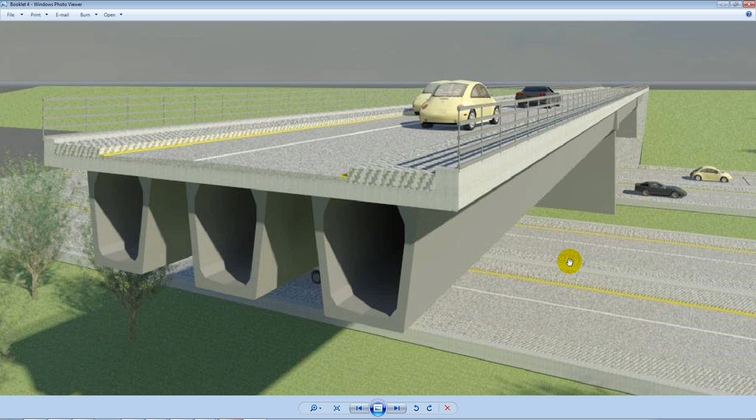Hi, in this video I will be showing you an example of a two-span composite precast concrete bridge. This bridge will have the W11 beam with a concrete deck on top of it. There are parapet beams at the two edges, and we'll have the central supports composed of two piers, and then at the ends we will have the abutments fixed to the deck.

Now let us see the details of the sections in the AutoCAD format before going to the modeling process. So that's the cross section of the typical deck section. As you can see here, it's a 10-meter wide deck section, and you have W11 beams. The center to center distance between the beams is 3 meters, and you have a 1.5 meter wide verge or footway at either end, and then you have a 500 millimeter wide parapet beam at the edges.

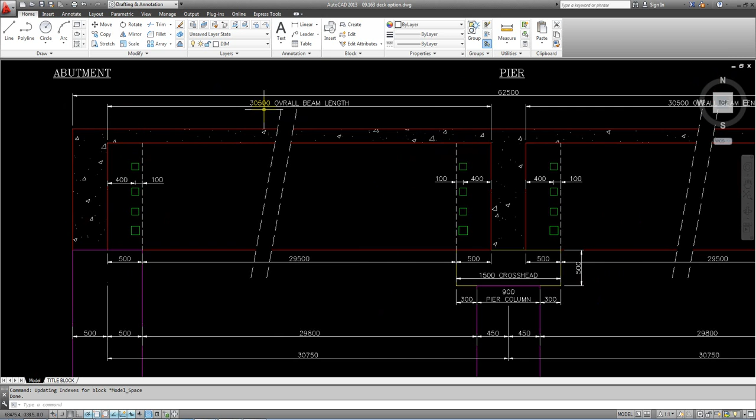And we will have pre-stressing applied to this bridge when we see the modeling of the bridge. The pre-stressing is typically applied as pre-tensioned strands with a load of 200 kilonewton at each pre-stressing strand. The concrete class for the precast beams will be C50, and the rest of the concrete elements, that is the deck, the parapet beams, and the abutments and piers, will be C40 grade.

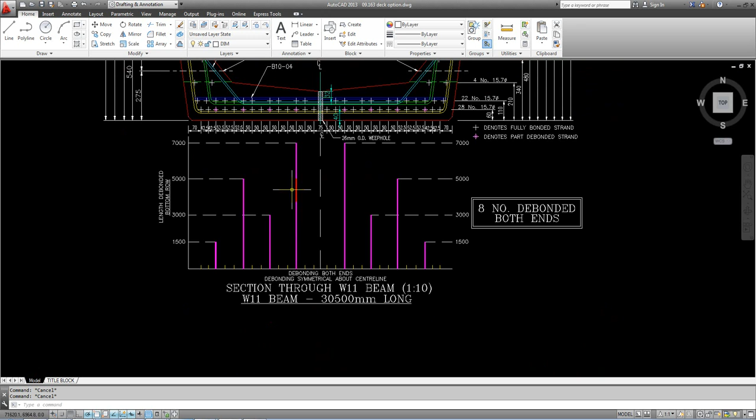We also have some debonded tendons at the bottom fiber of the precast beams, and the debonded length is shown in this diagram here. So they are varying lengths, and we will incorporate them in the modeling procedure. So without any delay, let's start the modeling for this bridge.

So I've opened up the blank Midas Civil file. I'll click on this option for new project. Okay, so here I have the blank Midas Civil window. I'll switch to the top view, and we'll start by creating a node. So that's 0,0,0, apply, and we have a node here. Then we will extrude a main or longitudinal beam out of this node. So select all, we'll select this node, and I'll type in the distance by which I want to extrude.

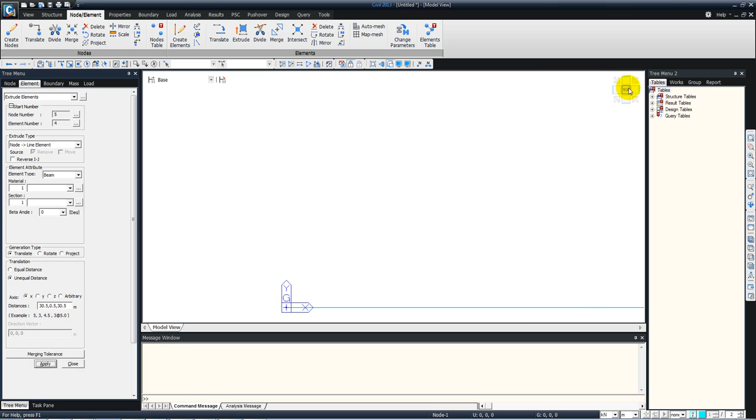So I'll put in unequal distance, and in the X direction I'll say 30.5 meters, which is the length of one precast beam, and then we have a gap of 0.5 meters, and then another precast beam 30.5 meters, and say apply, and switching back to the top view, you can see the lines have been modeled.

Now I will copy this in the Y direction to get the other precast beams and also the parapet beams. So select all again, and this time using the translate elements feature, translating with unequal distance in the Y direction. So we have 1.5 meters, that's the distance between the edge parapet beam and the external precast beam. And then we have two precast beams separated by 3 meters, and then another parapet beam separated by 1.5 meters, and click apply. So that's what we have got here.

Now we will be doing a grillage analysis for the deck, so I will create the transverse grillage members. So I'll go to create elements and just create an element like this, and we'll copy this to the other side. So using the translate function again, and this time

equal distance, X direction, typing in 1 meter, and number of times is 30, and making sure that I check on intersect node and element, so it will automatically intersect the transverse beam at all the longitudinal beam intersection points, and apply. So that's copied now, and we'll create another one over this side. So I'll try to keep this bridge as symmetric as possible.

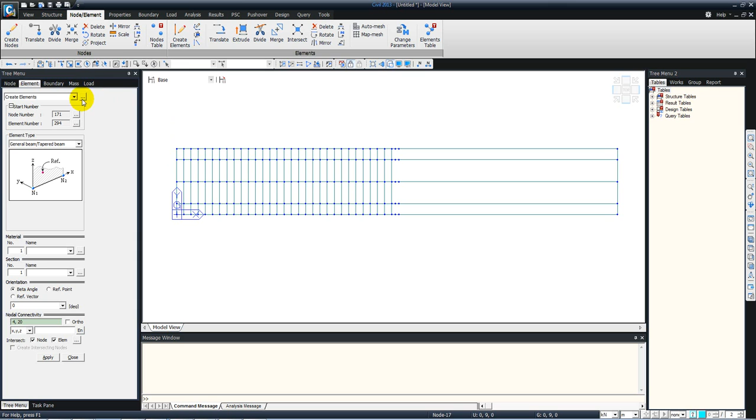So I'll create another one over this side and translate, and this time -1 meter and 30 times, and we'll select that transverse beam and say apply.

So that's modeled now. Now there is also a central diaphragm over here, so I will go to create elements and we'll model the central diaphragm like this. By default you can snap at the midpoint of a given element, so I'll snap at the midpoint here and snap here. That gives me the central diaphragm over here.

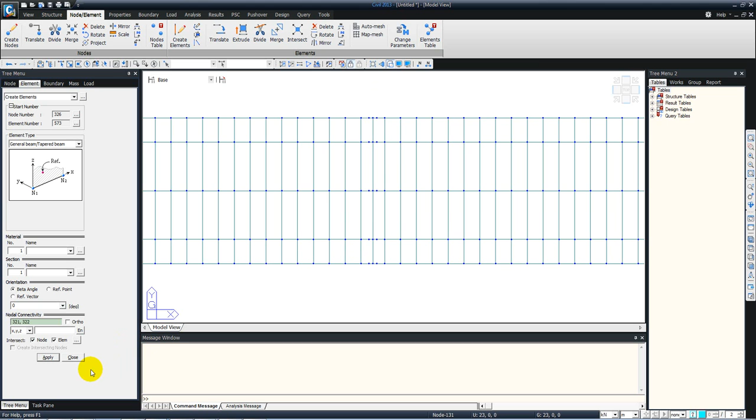And now I will create the abutments, the crossheads and the piers. But before going to the modeling of those elements, let us first define the sections and materials for the deck, what we have got here.

So for the sections, we will start with first the W11 beam section definition. So the W11 beam is a special beam which is the product of Banagher concrete. So that W11 beam we will bring in from the AutoCAD file.

Just to show you how the import can take place, I'll open up an AutoCAD file which has the skeleton of that section. So that's modeled with all lines. So if you have a polyline, you just use the explode function here, select everything and use the explode function to simply break it into lines. So right now they are all broken into individual lines, and save this as a DXF file. So make sure this is a DXF file, not a DWG file.

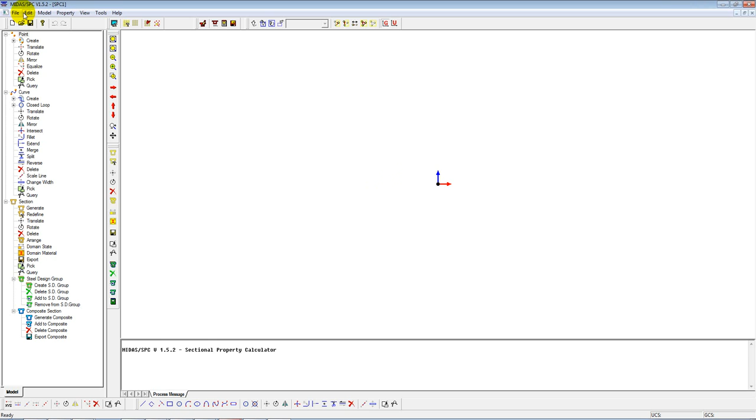Then we go to tools and we go to section property calculator and make sure the length units are same as the AutoCAD length units. So click OK and then go to file, import from AutoCAD DXF, and select the AutoCAD DXF file and click OK. Click yes, and that's your section here. These are only lines now.

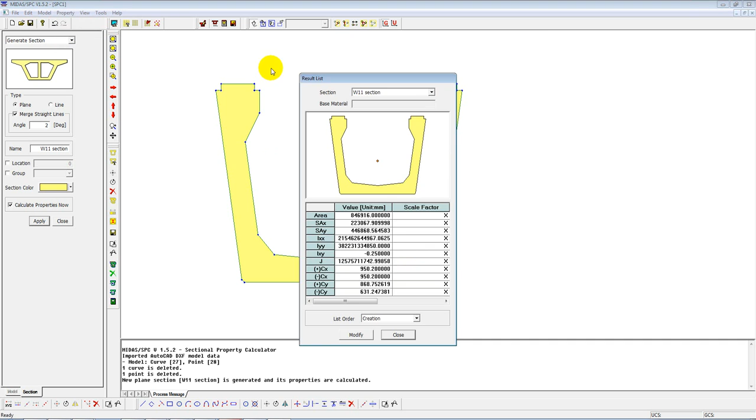So now I will ask the software to create section properties out of these lines here. So section and generate, and we'll make a solid section, so plane type, and select all the lines here and enter a name, say W11 section, then calculate properties now and apply. So that will quickly generate the properties of this section, and you have a dot marked here that represents the centroid for this section. To list out all the section properties, just to have a check, we can go here and say list section property, and it will show us all the section properties for this particular section.

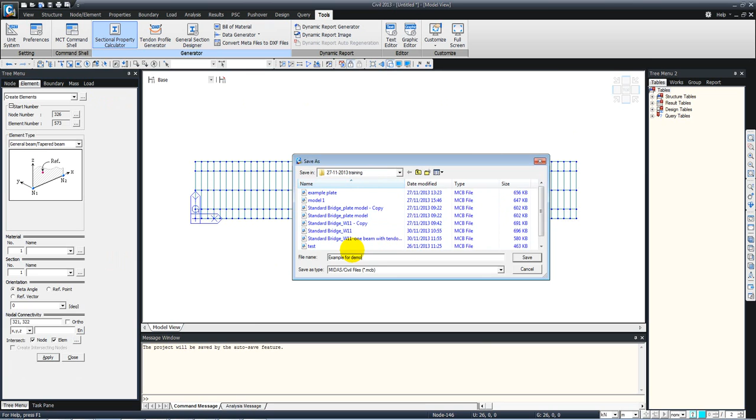Okay, now we will export this section back to our analysis package. So export, select Midas section file, click on this box here and say section for analysis, or give it any other name, save, and click on the section, click apply, close, and I don't need this file anymore, so I'll just say no. Okay, just in case I'll save this model as well, so you should always keep on saving the model from time to time so that you don't lose any data.

Now we go back to properties and say section properties and say add, go to the pre-stressed concrete type of section, PSC, say PSC value, and I'll type in the name, so this is W11. Import from section property calculator and click on the section which you just created, open and click OK. So here you have all the section properties and the section shape included in the main model.

Now you can change in the properties. If you expect some cracking in the section, you can change them here. You have to input some parameters for the design based on this diagram here. So the software also does the design of pre-stressed concrete sections. So this is for that purpose.

This particular data will not be used in the analysis, the T1, T2 and BT and HT, but I'll just enter some values here. So typically the thickness of the web and flange in this particular section is 0.17 or 170 mil, and the width of the section is 1.5 meters and height of the section is also 1.5 meters. Thickness for torsion is the total thickness of the webs, so that's 0.34.

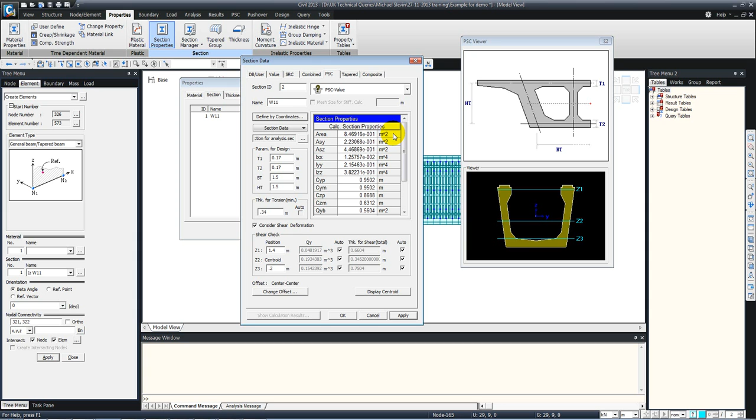So this particular section gets applied here. Now we are doing a grillage model, so the sections should be composite with the deck. So I'll use the composite section to create a deck on top of it and include the deck as well in the section properties. So select composite PSC, I'll give it a name, say composite section.

Slab width for one particular precast girder, that is effective slab width, I'll take it as 3 meters. Number of girders is 1, 3 meters, and 0.2 meters or 200 millimeters is the thickness of the slab. And now here I'll specify which precast beam I'm referring to, so that's W11. Click OK, and from the material I'll select the material for the slab and the material for the girder. So for the slab it is C40, for the girder it is C50.

And click OK. Now the elements are normally referenced as the centroid. The element line is always referenced as the centroid of the section, but for the purpose of analysis and applying the loads, we would want the deck to be at the top always. So I'll change the offset for the section and make it center top, so that now the element is referenced by the top fiber of the deck.

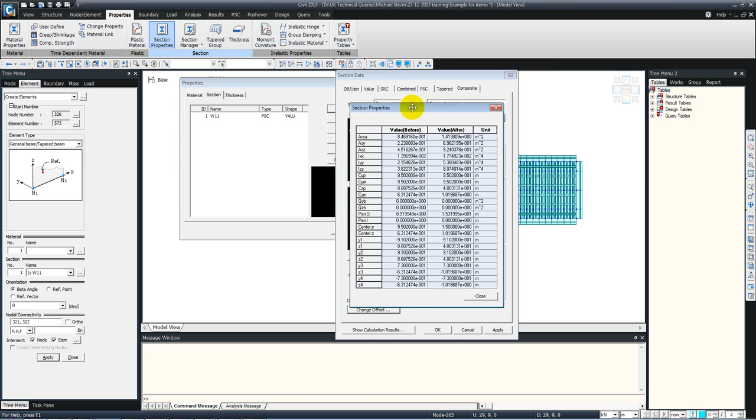And if I click on show calculation results, it will show me the properties before composite, that is due to the precast girder, and after composite, that is including the deck as well. So close this and click apply. So I've got the composite section. Now I will add some other sections. So I'll start with the central diaphragm. And that's a rectangular section. Height is 1.7 meters and the width is 1.5 meters, and that is also center top.

Okay, and apply. Then there are the end diaphragms. And the end diaphragms are 1.7 meter in height and 1 meter wide. Apply, again center top. Then we have the transverse grillage members. So transverse grillage members are also center top, and the height will be equal to the thickness of the slab, so that's 0.2, and we have kept a spacing of 1 meter for the transverse members, so the transverse sections will also be 1 meter wide.

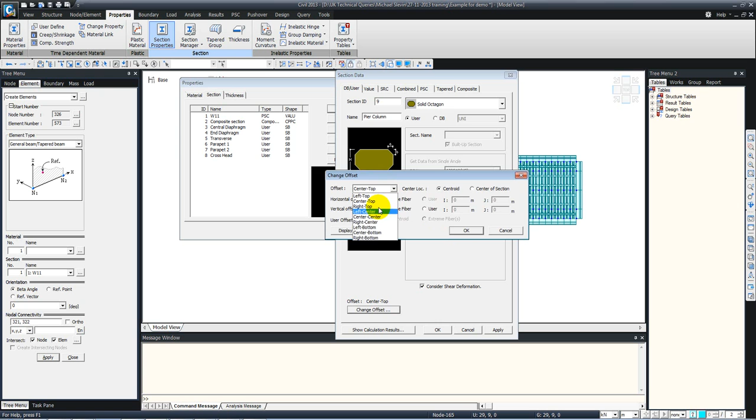Okay, and apply. And then finally we have a strip footing at the base of the abutment. So strip footing, that is a solid rectangular section, center, and 1 meter deep and 4 meter wide, and click OK. So we'll use these many sections for our model. Then I'll quickly define the materials as well. So I'll go to material, add, and starting with concrete.

The deck is C40. Now what we will do is we won't be defining any density for the deck. We will apply the deck self weight as a wet concrete load before the concrete becomes composite. So in the analysis we will be looking at the stage by stage analysis, that is what are the results before the deck is made composite, and what are the results after the deck becomes composite. So we will apply the weight of the deck on the precast beams when it is not composite with the precast beams. So that's why we are trying to keep the material density as 0, so that it is not considered automatically, and we have to manually assign the self weight of the deck.

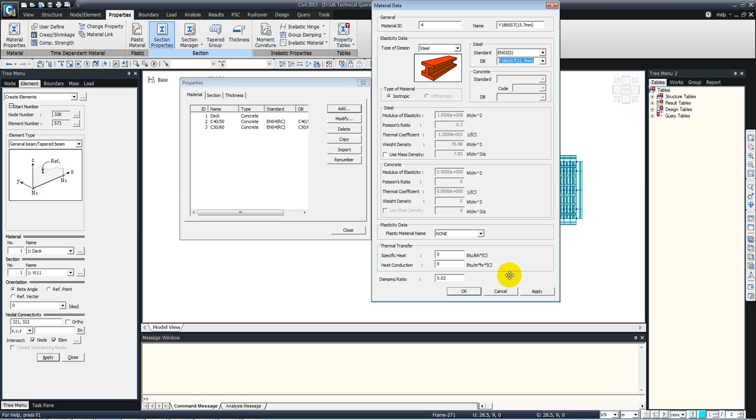So I'll change the name as deck here, apply, and then I'll model the other materials. So for the rest of the structure we have C40, apply, and then for the precast beams we have C50, apply, and then we have steel tendons. So we will be using 15.7 millimeter dia strands. So I'll use the highest tensile strength strands from here, and click OK.

So now we have got all the materials and sections we are going to use in the model. So the only thing now remaining to be assigned or defined in the properties is the thickness. The thickness will be used for the abutments, because abutments we will model as plate elements. So I'll add the thickness, and that is 1 meter thick. Click OK and close. So I'll close this now.

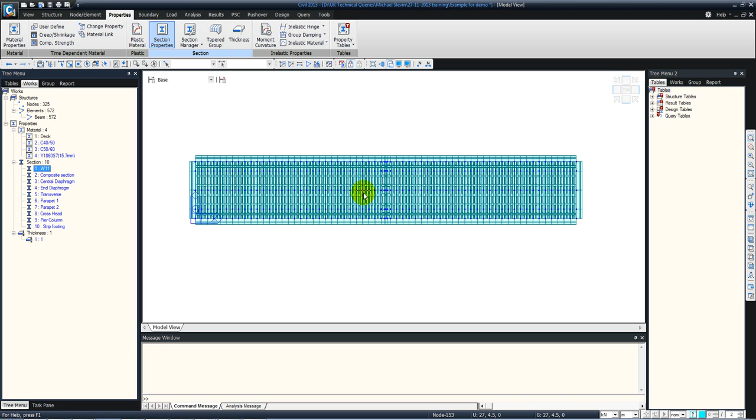As you can see on your model view, we have all the sections assigned with material 1 and section 1, and we don't want to do that. We need to correctly assign them now. So we will use a simple drag and drop feature in Midas to correctly assign the material and the section properties. So I'll change back to the wireframe view by clicking on this button,

and first I'll start by selecting the precast beams. So selecting all the precast beams, which are the central beams, and drag and drop C50, double click on C50 again, and drag and drop the composite section.

Now I will change the transverse beams into transverse sections. So what I'll do is make the selection filter Y from here, and select all. That will select all the transverse members, all the Y direction members, and drag and drop transverse. Double click on transverse and drag and drop deck, making sure that is deck material. And I'll now switch this back to none. Otherwise, you will always keep on selecting the Y direction members.

Okay, now we'll modify the transverse properties at the ends, because these are not transverse elements but diaphragms. So these are the end diaphragms. So drag and drop end diaphragms, double click on end diaphragms and make sure they are C40 material. Okay, then we do the same here for the central diaphragm. So we select the central diaphragm member and drag and drop central diaphragm, double click on central diaphragm and drag and drop C40. So for each element we need to make sure that we have the correct material and correct section properties assigned.

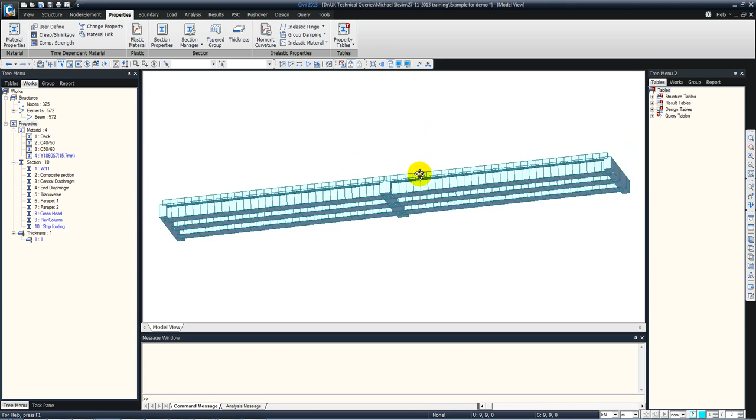Okay, then we have got the parapet beams here. So I'll just select one of the parapet beams and make it parapet 1, another one here and assign parapet 2. Let's check the sections by clicking on the hidden view and switching to the side view. Okay, let's check from the bottom. We've got the sections correctly assigned except for the parapet sections.

I'll show you why. I'll inactivate the end diaphragm, and let's see from the side view. Okay, so we don't want the parapet to be inside this line, we want it to be exterior to the slab so that the dimensions meet accurately. So what I'll do is double click on parapet 2 and drag and drop parapet 1. So shift it this way and select this parapet, drag and drop parapet 2.

Okay, now we need to shift them both downwards, because the offset we specified for the parapet was center bottom, which means the left and right bottom corners now represent the reference line. So I will shift the offset slightly so that it meets exactly at the deck level. So I'll right click, go to parapet and change the offset to user defined, say 0.2 meters, click OK and click OK. So that's shifted downwards.

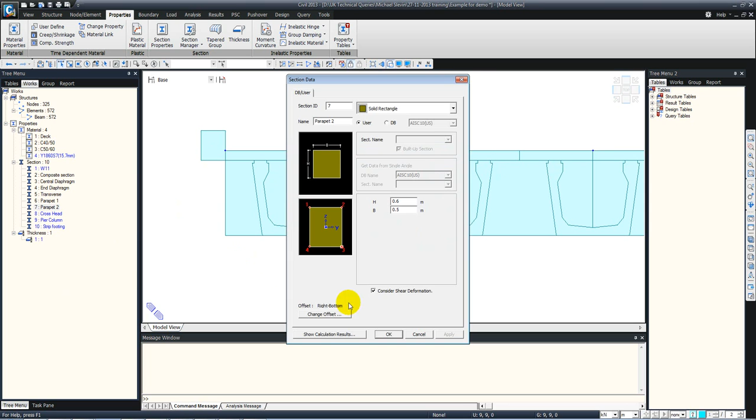Repeat the same thing for parapet 2. So 0.2 meters, OK, and click OK. So that's done. Now we have all the section properties in there. Okay, now I will activate everything. This button will activate or bring everything into the display.

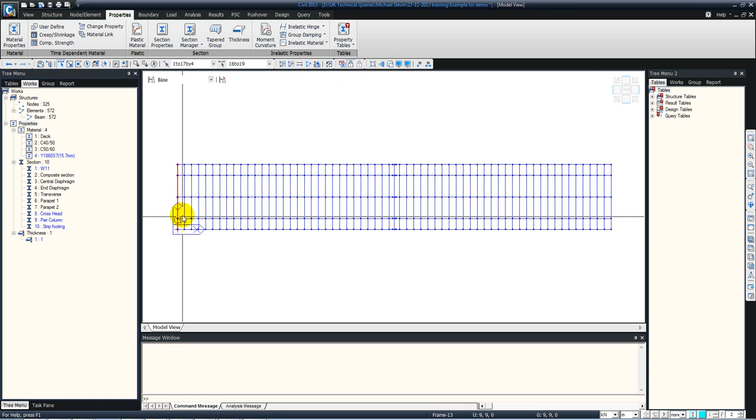Okay, now just to make sure that the parapets have the correct materials, I'll select both of them and drag and drop C40 just to be sure we didn't miss anything. Yep, it seems everything is defined here, and now I'll change back to the wireframe view and we'll start modeling the substructure. So let's start with the abutments first. So I'll select the elements here and here, and we'll create plate elements vertically.

So for the plate elements, I'll go to node element, extrude, line to plate, and we'll check off the remove option, otherwise what will happen is the source line, which is the diaphragm, will be removed. We don't want that, so select that and selecting C40 material, thickness is 1 meter for the abutment, and say -1 meter 5 times, so that will generate a 5 meter abutment with 1 meter divisions, and apply.

So that's the abutment generated. Now we will create the strip footing below that. So create elements, and we will select C40 again and select strip footing, and just connect the 2 points like this, here and here, and let's see from the hidden view. So I'll click here, and now you can see that the thickness and the strip footing is visible.

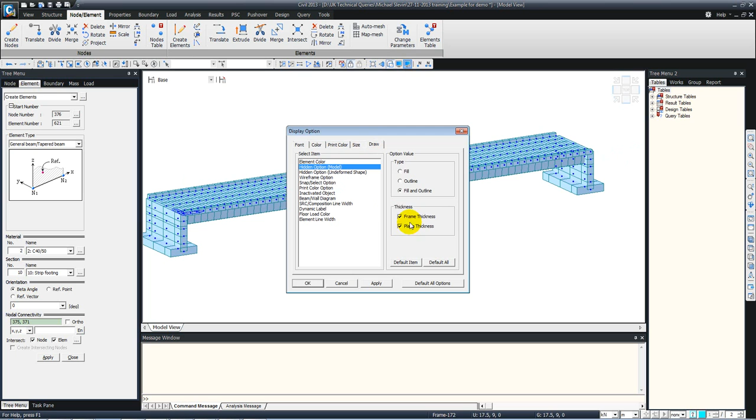If you are not able to see the thickness for the plates, then probably one of the options is checked off. You can go to display option here and go to draw and make sure that both these options are checked on, frame thickness and plate thickness. And once it is on, you should be able to see the thickness as well.

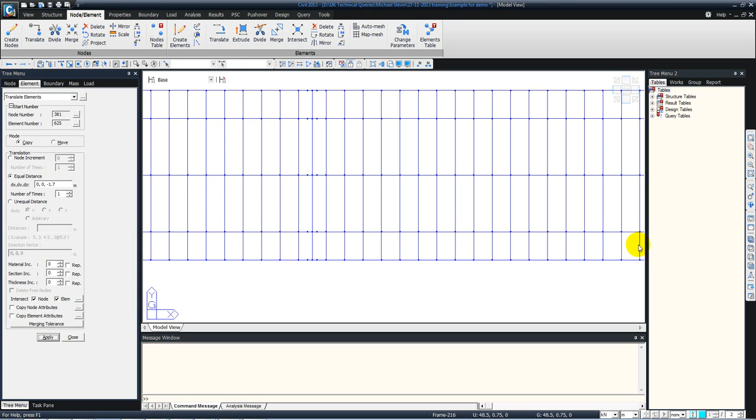Okay, now the next thing is the crosshead and the piers over this location. So I will again switch off the hidden view, go to the top and zoom in and select the central diaphragm here. Okay, and now I will copy this diaphragm downwards. So I'll go to node element and say translate and copy this in the Z direction -1.7 and apply. Let's check. So that's copied here.

But remember, I copied the central diaphragm, so this is also a central diaphragm section, you can see from here, but we don't want that, we want a crosshead. So I will just select these elements and go to the works tree here. If you are not able to see the tree menu on the right, then you can bring in the tree menu by right clicking on this blank part and say tree menu 2, and then you can go to works here. So normally your dialog boxes will open on the left, and the other tree menu options you can access by getting the tree menu 2 activated. So I've selected this section and now I'll drag and drop crosshead, and you can see the difference now.

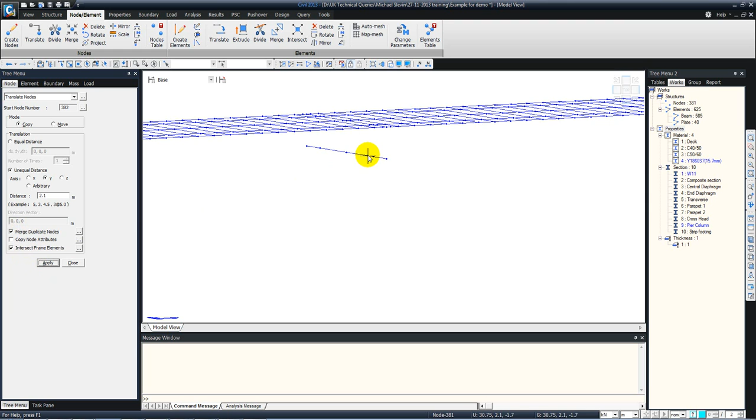Okay, so let's mark the points from where we'll drop the columns. So I'll just use this node and say translate, copy, and just enter the distance. So let's say Y direction, and that's 2.1 meters, and say intersect frame elements and apply. So we have a new point here, that point will be the column location. Then do the same thing for the other end, this time -2.1 and apply.

Then we go to extrude, node to line elements, C40 and Pier column, and enter the distance. So that's -5 meters. Let's say keep it 4 meters, and we'll use these nodes, this one and this one which we just created, and say apply. Let's check from the hidden view whether we have got the section dimensions correctly, and yes, they are entered correctly.

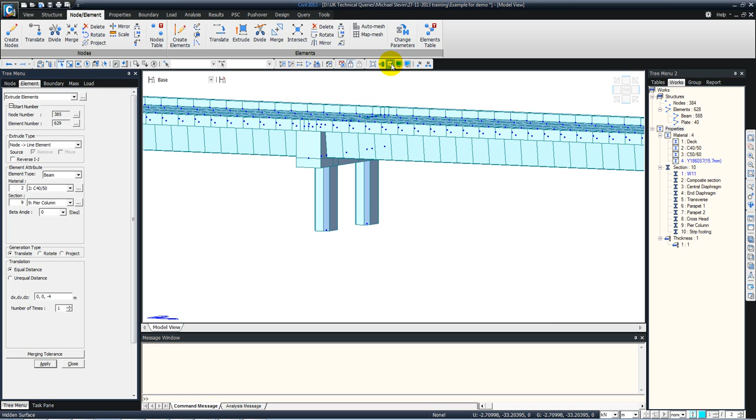So now the sections are all in, materials are properly assigned, so we'll start applying the boundaries to the structure. So switching off the hidden view, we can see clearly that there is a gap. Though visually by rendering it seems that the sections are just in contact, we have a gap here. These elements are hanging in midair, so we need to connect them rigidly. So for that purpose I will use the function of rigid elastic link. So go to boundary, elastic link, and make it rigid, and we'll just connect node to node.

So start by this member, this node here, and just drop in more number of links. Okay, so between this and this, just a minute. Yeah. Okay, and here again.

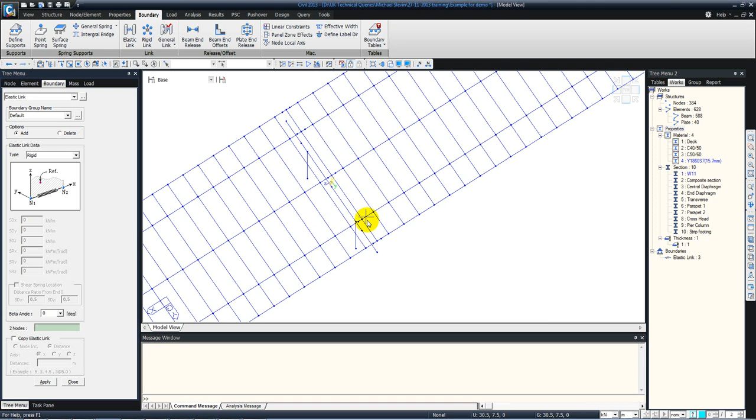Okay, so in order to apply the links, I'll just activate the member at the center, so it's easier to assign that way. So I've selected and activate, and let's just display the links we have applied till now, and now we can easily select and create the link. So that's done now. We have made the crosshead to be rigidly connected with the central diaphragm. Now we activate the entire model again, and we apply some supports at the column bases and also supports to the abutments.

Okay, now let's start with the pier columns first. So go to define supports, and the pier base, select the nodes here and say fixed in translation, fixed in rotation, apply.

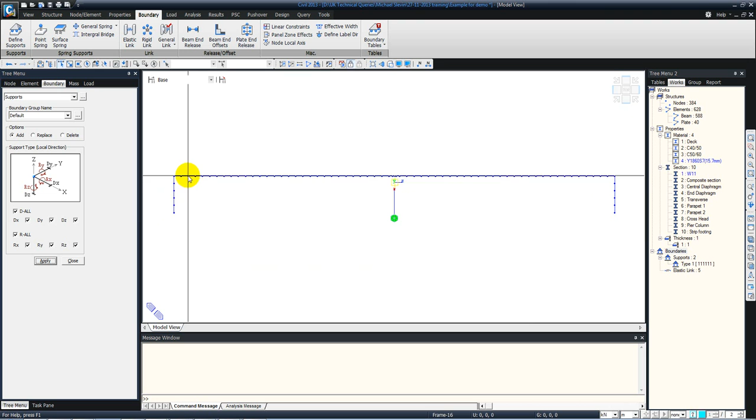Then we will apply some boundaries to the abutment. For applying boundaries at the abutment, we need to be sure that we are applying the boundaries in the correct direction. So normally we have the boundaries applied in the local direction of the plates, in the local axis direction.

Okay, so let's check the local axis of these plates. We can check the local axis from Display, Element, Local Axis. Click OK, and let's change to the front view, and you will see that the local axis of these abutment elements, they are in the same direction. See, so this may lead to wrong assignment of soil pressure or boundary conditions, because we want the soil pressure to be applied in the opposite direction for both these plate elements, and you can see both of them are oriented towards the same direction.

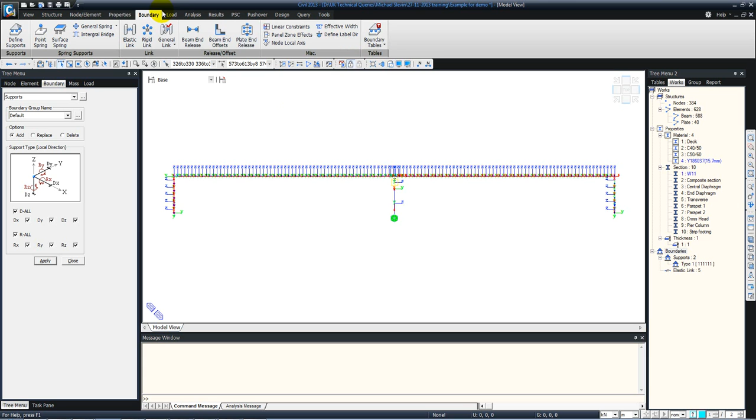So what I'll do is I'll just select the abutment over here and go to Node/Element, Change Parameters, and say Reverse Element Local, and apply. So that will reverse the local axis of the plate element on this side, or the abutment on this side. So now I can start by defining the boundaries.

So I'll check off the local axis display and go to Boundary, Integral Bridge, and select the abutment spring. Direction is normal to the plate. Element list, so that is the elements which constitute the abutment. So I'll select all the elements here. Select nodes for the footing, so for the strip footing I select the nodes here, and now I'll enter the height of the abutment. So just click on the 2 points like this to enter the height. Abutment width, click like this.

And deck length, so we have the deck length here, and then void ratio, so we entered the void ratio, and the maximum differential thermal expansion allowed in this bridge, so let's say 20 degrees Celsius. If you're not able to see your units in Celsius, you can always change them from Tools, Unit System, and make it Celsius. Okay,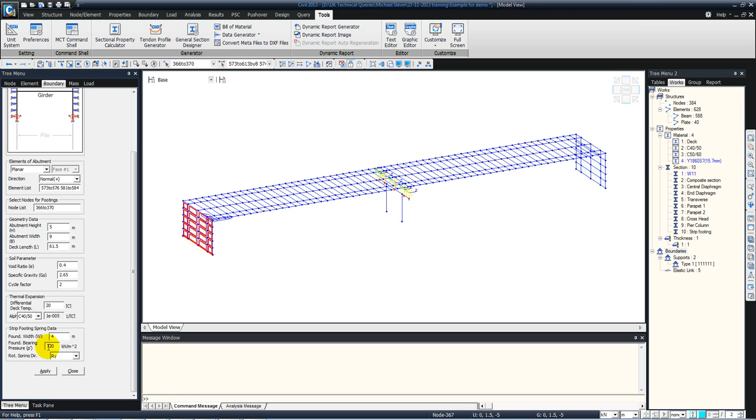material is generally C40 for the deck, and for the strip footing, we'll apply some foundation width, which is 4 meters, and bearing pressure 120, and apply. So that is applied: some compression only springs for the abutment, and some linear springs for the strip footing. We'll do the same on the other side. So unselect all the elements and then select all the abutment elements here, select all the nodes for the footings and apply. Close this. So we have got all the springs here.

If you want to change the spring stiffness of any of these springs, you can always right click and go to Properties and change the spring constants. If you double click, they will highlight which node they belong to. So as you can see, it's highlighted here. Then you can also check the compression only springs for the lateral direction. Okay, so that's applied. The boundaries are applied. Now we will go to the load application.

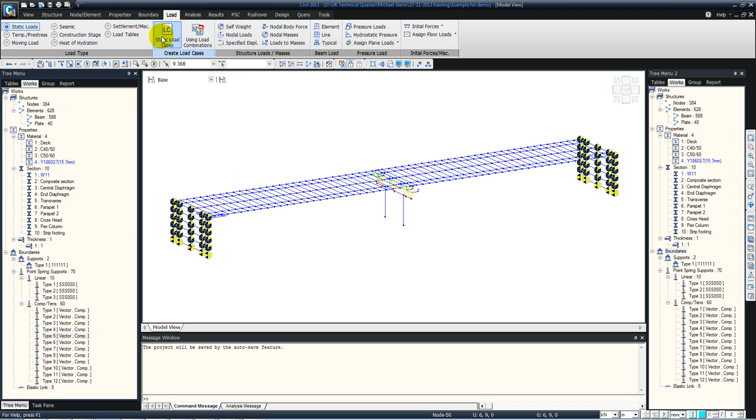So we'll start with defining some static loads. So we go to Loads, Static Load Cases, and give a name to the different cases. So starting with self weight, say dead load of wet concrete. So wet concrete, this is load which will be used in the construction stages. I'll just define it as a construction stage load. You can also put self weight as a construction stage load if you want to, because then it will only be considered in the construction stages. So I might as well do that.

So self weight, add, then we have pre-stress. So pre-stress will also be applied on the tendons in the construction stages. So just say add. If you apply it as a static load, you just change it to pre-stress type from here. So pre-stress, and then you can consider it both in the construction stages as well as in just a normal static analysis.

Then we have surfacing, which again we will apply in construction stages. So add, then parapet will be like a dead load to the construction stages. So add here, and then we have earth pressure, which will be applied in the construction stages. Add. So that's it. We have applied most of the loads here. We can also include uniform temperature load if you want to as a static load case. So just change it to temperature, add, and you can add wind loads and other loads, but this is a very small bridge example, so we'll not go for wind loads or other kinds of loads here.

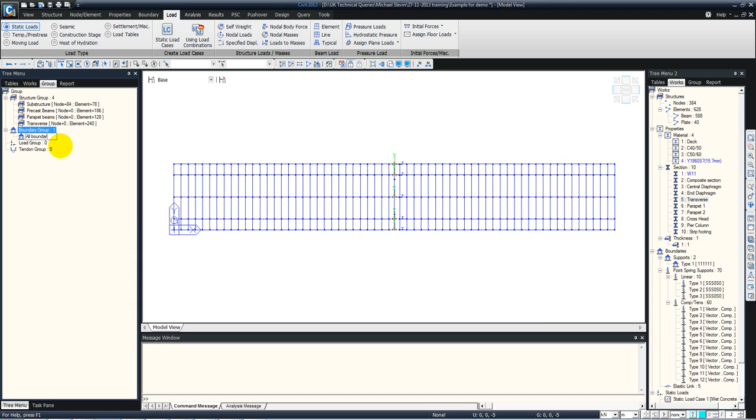Okay, now I will create groups for the boundaries. So right click new, and in the first construction stage I will use all my soil springs and all the fixed supports in my model. So I'll say all boundaries, and select everything in the structure, all the boundaries, and drag and drop. So it will include all the boundaries in the structure under one group. So when I say I want all boundaries in construction stage 1, then the software will apply the links and supports to different nodes.

Now we create load groups for different load cases, starting with self-weight. Then create a group for pre-stress or pre-tension. Create another group for wet concrete. And create another group for surfacing. We have parapet loading. Okay, and we also have soil pressure. Let's go with these cases for now, and later on we'll also see the tendon groups.

So let me first apply the static loads. Let's focus on the deck first. So I'll go to static loads, self-weight, select self-weight, and select the load group self-weight and say -1. So that will assume self-weight in the gravity direction. Add.

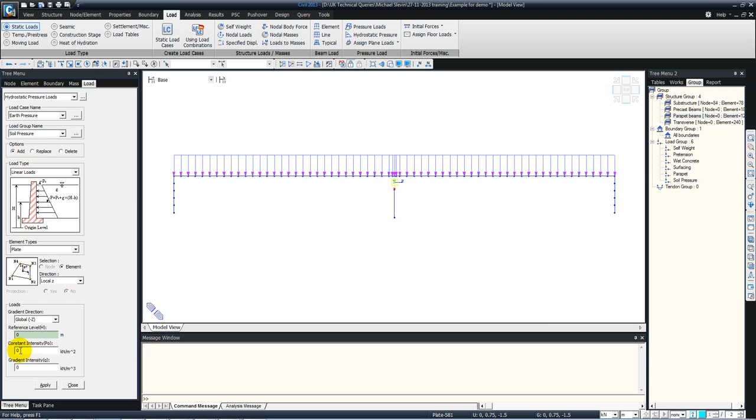So that's the loading for the deck and the parapet, and now we will load the abutments. So select hydrostatic pressure loads, select earth pressure, soil pressure group, and reference height is the top. The direction is local Z of the plate elements. Constant intensity, this is the pressure at the top, which we can assume as 0 because we don't have any surcharge at the top.

Then gradient intensity, this is the variation of the soil pressure with depth. So we'll enter 19 times the active pressure coefficient, and select the soil pressure, select the abutments to apply the soil pressure, and apply. So that is applied successfully on the abutment.

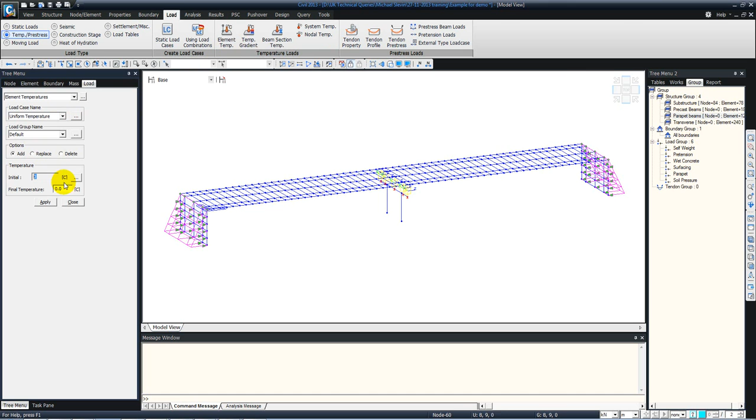Close this, and now we will shift to the uniform temperature. So temperature pre-stress, element temperature, select uniform temperature, initial temperature is 0, and final temperature: we can double click on all the composite sections and assign them 20 degrees, apply, and close. We can similarly apply another uniform temperature case for the cooling, so we can enter -20 in that case and consider the cooling effect.

Okay, now for the tendon profile, for defining the pre-stressing tendons in the precast beam, I'll first go back to the AutoCAD file just to show you how the tendons are arranged and how we will consider them in the software. So that's the cross section showing all the tendon arrangements. You can see the cross marks, they represent the tendons in the bridge section.

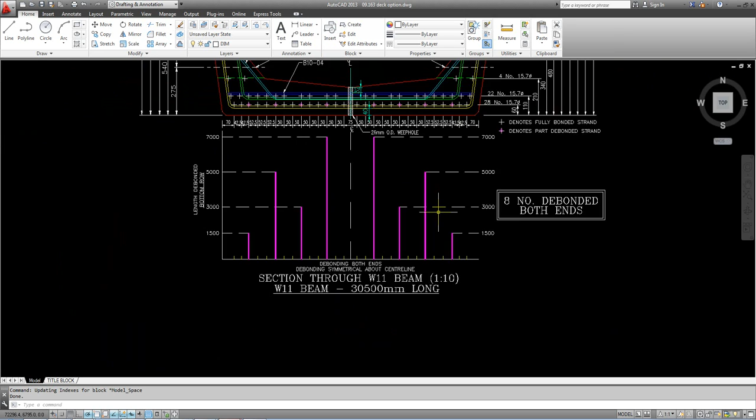So we have tendons at different levels which are measured from the bottom fiber, 60 millimeters, 110, 210, and going up to 1430 mil from the bottom fiber. So we will use the bottom fiber as the reference, and we will enter the distances as per this drawing. Then we also have the tendons debonded by certain lengths at both ends, so we will use them accordingly.

Okay, so in this example I will not model each and every tendon. I'll model a few of them, and then I'll bring up another model where I have already done the tendon modeling, just to tell you how we will be going through modeling all these tendons. So in Midas we can enter the tendon profile, the start and end coordinates of the tendon longitudinally, and also the tendon offset from the center line of the element in the lateral direction and also in the vertical direction.

So we have so many different tendons, we can group them. Instead of entering each and every one, we can enter 2 tendon strands at a time, so we'll enter pairs of tendons at a time. Because the bridge is highly symmetric, we can also apply 1 tendon at the center, which is 22 times the area of 1 tendon. So we can increase the area of the tendon at any given location and apply the tendon in the center if you have a symmetric arrangement of tendon profiles, which we can see in this case is true. We can apply a large tendon here, which is 22 times the area of 1 strand, and consider that in the analysis. That will give you the same results as the different tendons in different locations.

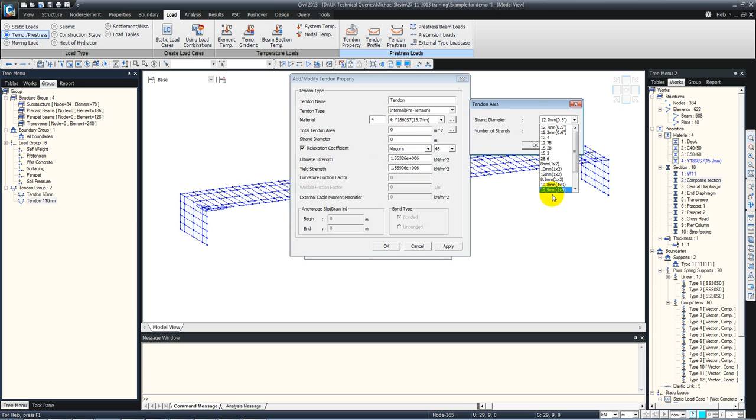So I'll go back to loads, temperature, pre-stress, and tendon property. Add, give the name to a tendon, and we will be doing precast beam analysis. So pre-tension tendon, the material is high strength steel. Tendon area can be selected from this box. We can select strand diameter and enter the number of strands we want for one particular tendon point. In this case we will apply it manually.

So 3.14 pi times 0.0157 squared and divide by 4, and the diameter is 0.0157, and for relaxation coefficient as per Eurocode we will select ordinary tendon, and we don't have any friction or anchorage loss, and when we click OK, that's the tendon property added.

Now we will define the profile of the tendon. To define the profile, we'll try to activate one particular girder and assign the tendons to that particular girder. So I'll just right click on composite section and say active, and even here I'll just select one particular beam and say active. So that's one girder. And now going to tendon profile, add,

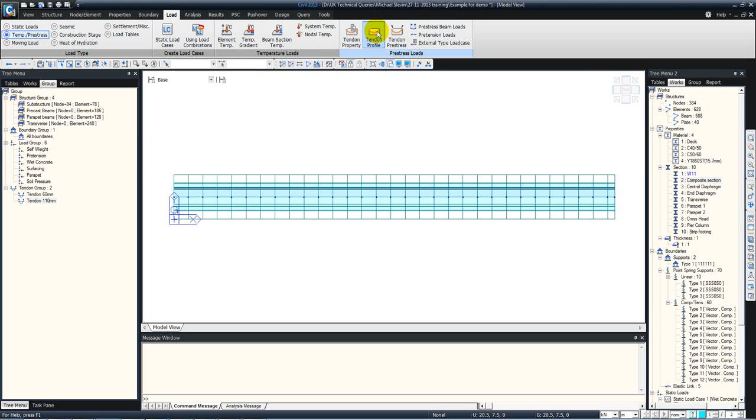and select the tendon name. So the name of the tendon is say 60 millimeter, left tendon 1, strand 1. Property of this tendon is tendon, and the group is tendon 60 millimeters. Then assigned elements, so this will define which girder I'm talking about. So I'll just select everything on the display,

then select 3D here and enter the length coordinates for the tendon, so 0, and the Z value, which is measured from the bottom fiber, so it's 0.06 or 60 millimeters, then 30.5 meters, that is the end coordinate of the tendon, and 0.06 meters. Now we specify the starting point of the tendon, so I click here and click on the first node here.

Then we define the offset of the tendon in the lateral direction. As per this particular figure, we are defining for these two tendons here. So we'll take the offset as the distance between the center line and up to here, which is roughly 660 millimeters.

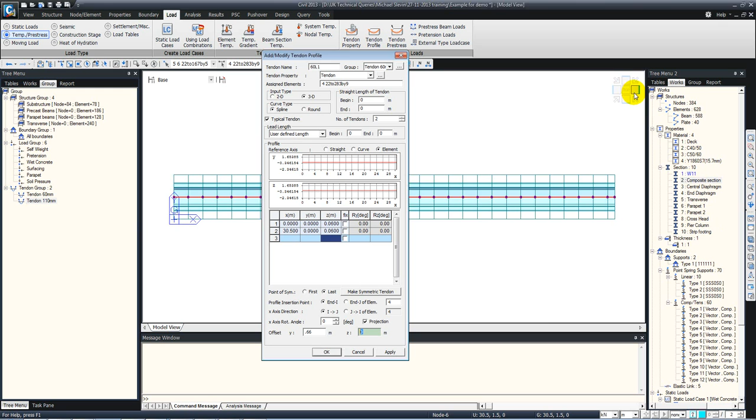It's 0.66, and Z offset, this is the offset that we provided for this section. So if you remember, we provided an offset as center top, which is this. So since we are measuring the distance from the bottom, we need to give an offset so that the line is fixed at the bottom. So we just enter -1.7 and we click apply. So there we go, there we have one tendon here.

We do it for the other end as well. So R and say -0.66 and apply. So we have another tendon here. The group is same, everything is same. Then we go for the next one. So the next one in this drawing is this circle one. The circle one represents the debonded tendon. So that's the debonded length from each end of the girder, 1500 millimeters, 1.5 meters.

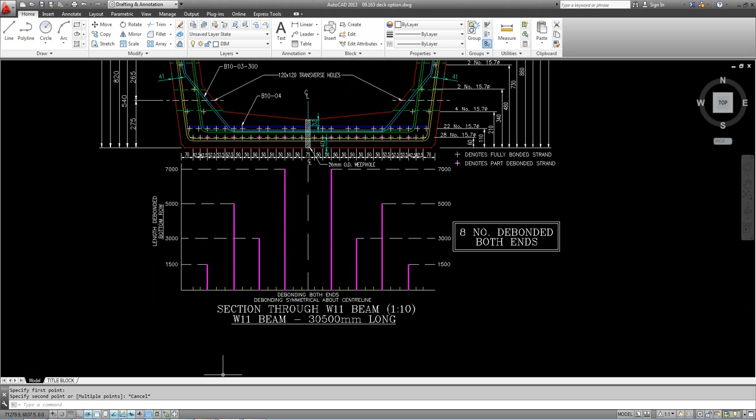So let's see how we can enter it here. Okay, so we change the name, make it typical tendon as 1 because we have only one debonded tendon. Group is the same. We want to keep all tendons at one given level under the same group name. Then we enter 1.5 as a start coordinate and we subtract 1.5 from the end, so that will be 29 meters. Okay, and we change the offset, so the distance from the center line for the debonded tendon, it's 0.6 meters, and we click apply. So that's another tendon modeled here, that's the debonded tendon.

Then we change the name, make it L2 and change it to plus 0.6, apply. So we got another here. Similarly, we can add the other set of tendon, that's 3, and we change it back to 0 because this is the normal tendon, not the debonded one. So using full length of the girder, and typical tendon is 2, so we are entering again a pair of tendons. This is just to reduce the time in adding tendons, otherwise you have to add each and every strand. So you can activate 2 at a time.

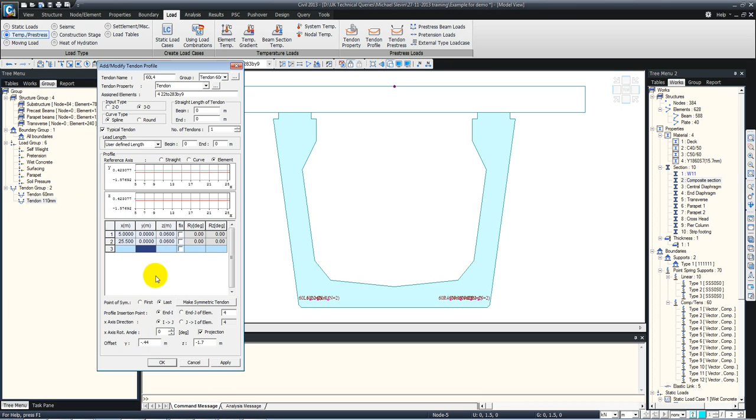So this one is 0.52 meters from the center. Apply. Create another one for the other end. Same, -0.52. Apply. And we have another debonded tendon. That is R4. We make it 1. And this time it is 5 meters and 25.5 from the other end, and the Y offset is -0.44. Apply and repeat it for the left hand side, plus 0.44 and apply. So we can keep on adding other tendons.

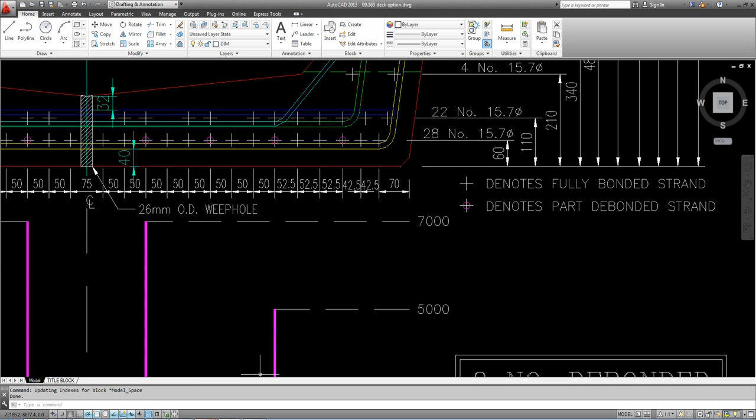So for the next level, say 110, we can add say 22 tendons at the same time. Let me just quickly do that. So I will change the group to 110, change the name as well, make it 110 and 0. We don't have any debonded tendons for the level 110 millimeters. 5, and number of tendons is 22 as per this drawing here. So we can enter 22 tendons and center them here. So going back to the model, 22, group is 110 and Y offset is 0 because it's at the center line, and we click OK.

Sorry, I didn't change the Z offset here. It should be 0.11 here, and click OK. So now that gives the correct location of the tendon. So like this we can keep on adding tendons in the different webs as well. So for the webs we add one web at a time. And then just change the offset value in the lateral direction and create another one on the other web, and thus we keep on adding the tendons.

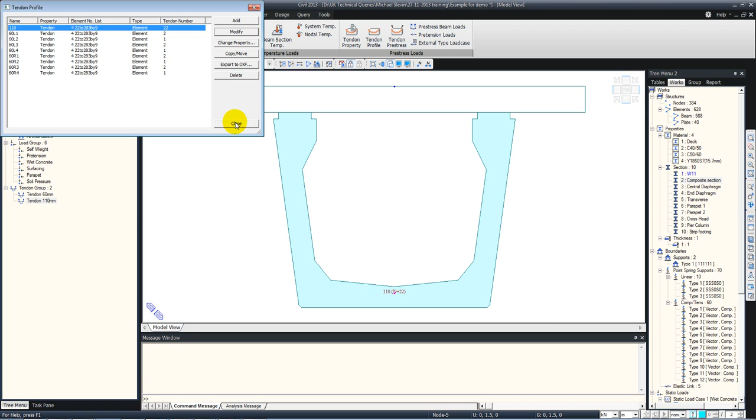Okay, now I will take you to the model where I've already added all the tendons, and then we can start modeling. We can start seeing how we can copy those tendons to other precast beams.

Okay, so this is the model which is completed with all the tendons for one particular girder. So I will just activate the composite beams and change the view, and we can change the display type to profile point. That's how the tendons look like. Okay. If I go to the top view,

you can also see the debonded tendons. So these are the tendon endpoints, these points, and you can see some tendons start from the midway and not from the ends. Those are the debonded tendons.

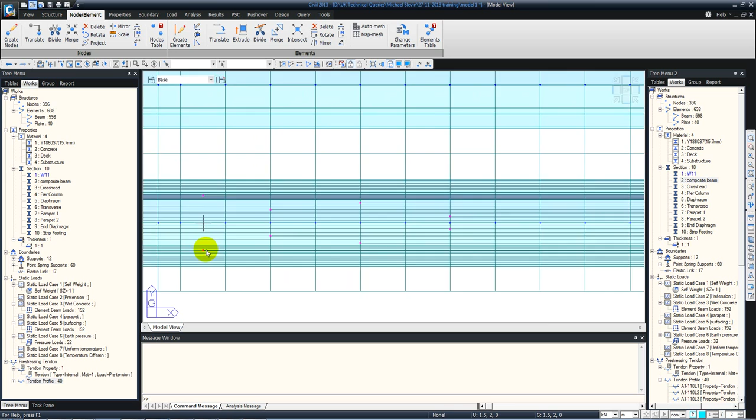Okay, so now I'll copy these tendons to the other precast beams. So before copying, we need to renumber the elements, since tendons are always referenced with respect to elements. So for copying them, if you renumber the elements, it's very easy to copy the tendons directly by entering the element number or the number of elements to be incremented for. So using the element numbers we can copy the tendons very easily.

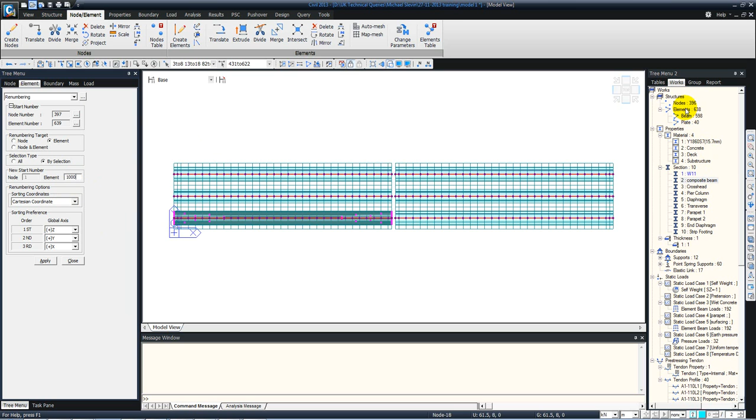So to renumber the elements, I'll go to the element renumber option, renumber element ID, select all and enter the start element number. So let's say start from 1000, because this element number may not have been used by any element till now, because we have total number of elements as 600. But it's always good to have a check, so you can just right click here and go to tables and see the last element number. So that's 638, so we can safely go for anything over that.

So let's start with 1000, and we can give an order for the renumbers, say order as per XYZ, and just select all and click apply. So now the element numbers have been changed. Let's check. If I switch on the wireframe view and display the element numbers, I can see they are starting from 1000, and they are arranged like this. So there is always an increment of 1 for the corresponding y direction girder, and also here they're arranged properly.

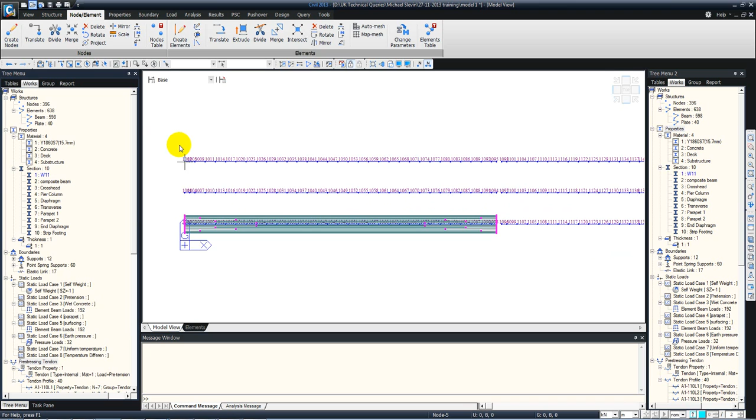So now let's copy the tendons. So I close this and go to loads, temperature, pre-stress, and tendon profile. Select all the tendons by pressing the first one and then shift and last one, and then go to copy move and say element increment. So if you want to copy from this girder to this girder, the element increment is 1 for the corresponding element. So 1, and click OK. So that's copied. Again go to copy move, this time press 2, click OK.

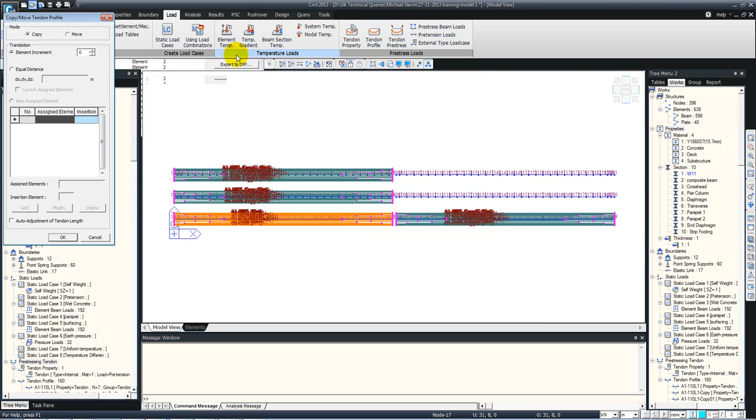Now here if you see, the element number is 1096, whereas here it is 1000, so there is an increment of 96. So you can just say copy move, say 96, and click OK. Let's check here, this copied. Copy move, enter 97, click OK, and copy move, enter 98, and click OK. So all the tendons are now copied.

Let's check by switching on the tendon profile point. Okay, and now I'll switch on the tendon profile point, and let's switch on the hidden view as well. Now you can see that the tendon profile is displayed. It's same for all the precast beams.

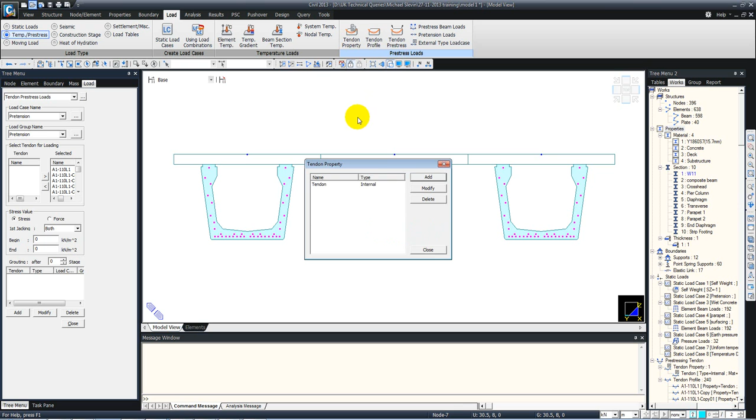The next step is to apply the tendon pre-stress, the pre-stressing jacking force to these beams. So tendon pre-stress, select pre-tension load, select pre-tension load group, select the tendon, so press shift and select the last one. Then we want to jack it from both ends, so both ends, and the applied pre-tension stress we can check. So I will see the area of the tendon from here, so copy the total tendon area, and the applied pre-stress force can be referenced from the AutoCAD file. That's 209 kilonewton.

So I'll just include 209 divided by the area which we just copied, and copy the same thing here. Copy, paste, okay, and add. So that's pre-stress has been applied to all the tendons. So now I'll close this.

So let's start the modeling of the construction stages now. We have created the groups already, and we can start the construction stages. So basically we'll keep the things simple. We'll construct it in 2 stages. First stage we'll have the precast beams with abutments, piles, and abutment piers and all the substructure there, and the formwork, the wet concrete load of the slab acting on the precast beams. Then in the second stage make the section composite, and then we'll keep a third stage for the long-term creep and shrinkage effects for the loss calculation in the tendons.

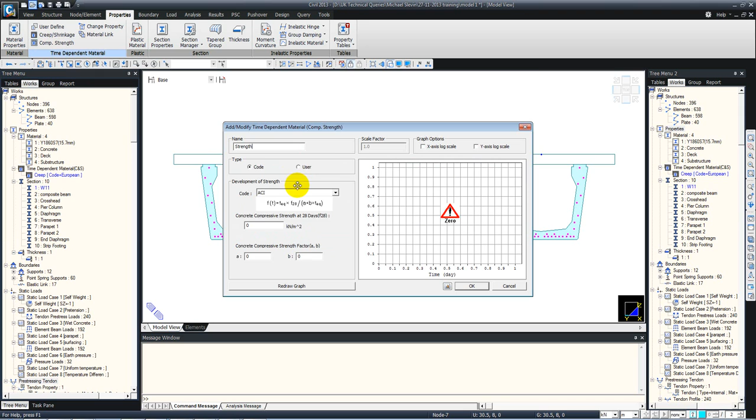And click OK, close. Then we'll define a strength function. Strength of concrete varies with time as well, so strength, and select Eurocode, mean compressive strength of concrete, which is FCK plus 8, so 58,000. Redraw, and that's the strength function of concrete that will be followed in the analysis.

Click OK. Then we'll link these functions with the concrete, so select creep and strength function, and we'll link them with the C5060 material, that's concrete, add, and close.

So let's define the construction stages now. So we go to loads, construction stage, define construction stage, and add. So first stage is stage 1, say duration is 28 days, let's say it's 7 days, and we include in this stage all the precast group members, all the substructure elements, all the parapet elements, and also the transverse elements. So add them.

Now for the precast members, we need to specify the age at which we are applying the pre-stress. So then it will take the correct strength of concrete as per the pre-stress applied. So I'll just change it to 7 days and modify. Okay, just so that you don't confuse between this 7 and this 7, I'll change this duration to 10 days. And for the others I don't need any age because I'm not considering any creep or shrinkage for them.

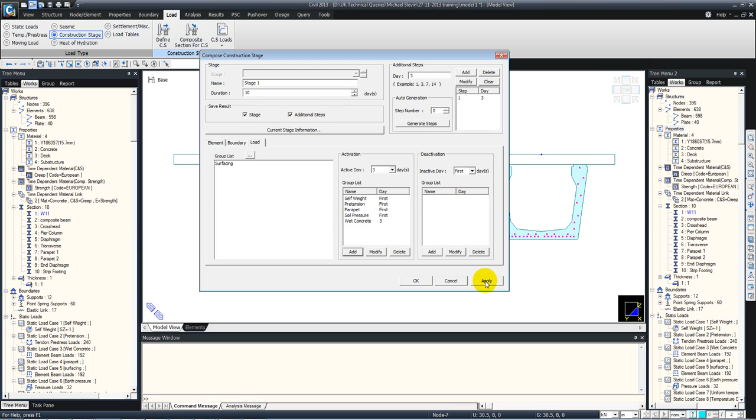So just say add. Now the wet concrete load also starts acting, so that starts acting on the 3rd day for instance. So we can add a day here and say add and include wet concrete on the 3rd day, add, and say save additional step result. So it will save the results of 3rd day and 1st and last day as well. So click apply. That's the first stage added.

Stage 2 is the stage when concrete is poured and when the deck becomes composite with the girders. So in this stage we don't add anything new, just we add surfacing on the last day. So on the last day of the construction we add surfacing. I just delete the intermediate step, we don't need it for this stage. So for the last day we have surfacing, apply, and then we have stage 3 which is long term stage.

So I'll just name it long term and change the duration to 1000 days just to see the long term effects, and nothing new to add here. So I'll just click OK. So let's review the stage 1 and see what we have done here. We have activated basically everything.

We have the formwork in place, we have the transverse members which represent the formwork and the wet concrete, the slab in the transverse direction, and we have the parapet beams which include the edge parapets, and then we have substructure which includes the piers, the abutments, the diaphragm members, everything. Then precast members which are the W11 beams.

Then we have boundaries which include soil springs, rigid links, and the fixed supports of the piers. Then in the loadings we have every type of load, self-weight, pretension from the very first day, soil pressure, wet concrete, etc. So that's it. Close this.

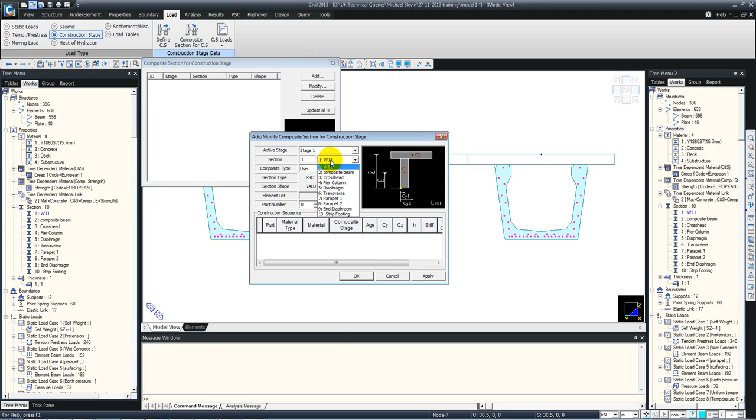Now we will tell the software which part in the composite section will be activated in which stage. So I'll click on this option and say add and go to stage 1, select composite beam, and you can see part 1 and 2. Part 1 is the W11 beam, part 2 is the slab. So I'll select material, get concrete or C5060, whatever you have named it.

Stage 1, age of the girder at the time of activation in the construction stage. So we activated it with the age of 7 days. So type in 7 here, then material and say deck, and stage 2, that's when the deck comes into action, and we select 10 days, sorry, 7 days for the deck as well. H value for creep and shrinkage is automatically calculated.

So if you want to modify the stiffness of the members, if you want to assume a cracked stiffness, then you can change the stiffness scale factor from here, so you can enter some scale factors here and reduce the area of a given part, deck or the girder. So now click OK. You can enter creep shrinkage for the deck as well, but I have not entered it here, just to consider it for the precast beam only.

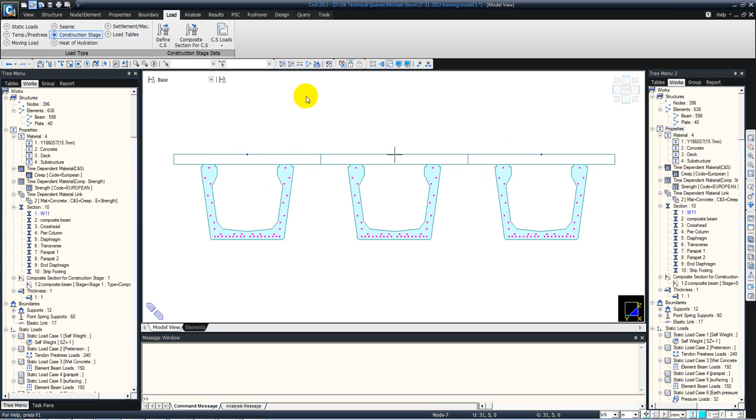So that's the construction stage modeling. Now we can check the different stages. So stage one has everything in it except the composite section, the concrete deck. Stage 2 has got the concrete deck in composite section in it, and long term has everything with an added time scale. So I'll go to base stage again,

and now we will see the live load application on this bridge. That comes under the moving load option. You can select the Eurocode from here and apply lanes, traffic lanes on this bridge and some vehicles, and do the live load analysis. For the live load analysis, the first thing for a grillage model is that we create a group that has all the cross beams in it.

I've already created a group that contains all the cross beams. Just change back to initial view, and now double click on cross beams. That shows the cross beam members that I have included in this group. So you need to include all the cross beam members, the Y direction members, under the cross beam group. Then we can go to traffic line lanes and start defining the lanes.

To make it easier in assigning the lanes, I will only activate the deck. So go to view, select by plane, select only the deck, and select active, so only the deck is active. Now we can create the lanes here. I go to loads, moving load, traffic line lanes, add, and enter footway 1, eccentricity minus 0.75, wheel spacing as 1.5, and lane width is 1.5.

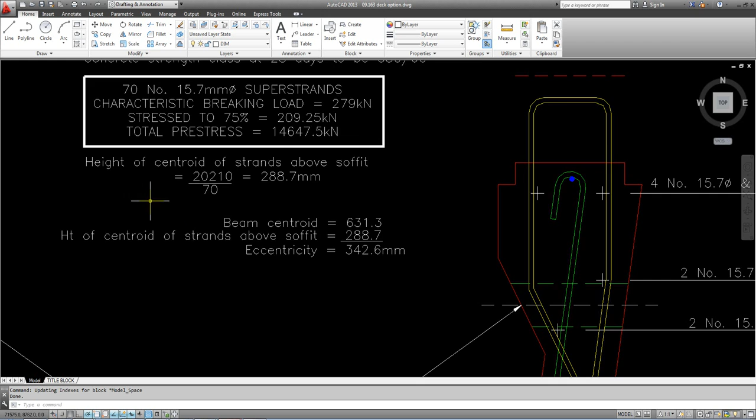Vehicle load distribution is cross beam type, so select cross beam and select the group that includes all the cross beam members. If you have a skew in the bridge, you can enter the skew angle here, so the lanes will also be skewed. Now we just mark the points, select point 1, point 2, and apply. So that's footway 1 added.

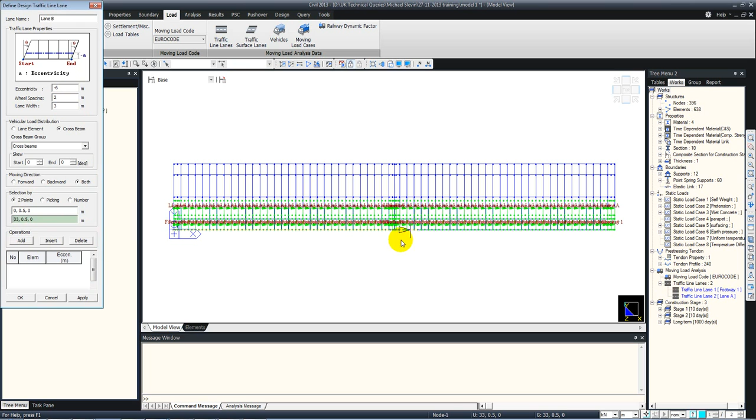Then we select lane A, and we keep the eccentricity as -3. Wheel spacing as per Eurocode is 2 meters, 3 meters is the lane width. Delete the previous information, again select the points and apply. So that's lane A, and then we do that for lane B as well. Change it to -6, delete the previous information, create the lanes again and apply. Then last one is footway 2.

We don't have any remaining area for this bridge, so I'll exclude the remaining area definition, 1.5 and 1.5 here, delete the previous information, define the lanes here and click OK. So all the lanes are now defined. Now we will define the vehicles to run on these lanes.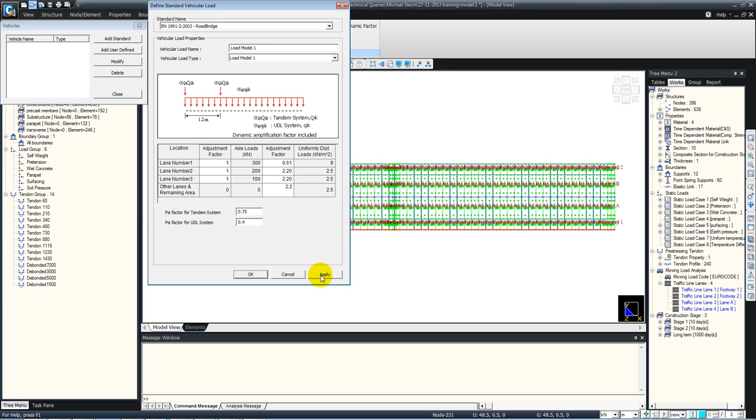So vehicles, add standard, start with road bridge load model 1 and enter the adjustment factors as per UK National Annex, 0.61, 2.2, 2.2 and 2.2 here, and apply. Then we have load model 3 UK National Annex, which includes SV196. We'll just change the name to SV196 and apply.

Then we have footway bridge load models, uniform footway, so 5 kN per meter square. As per the National Annex, we need to take 0.6 times the footway loading for group 1. So just change it to 0.6 times, click OK and close this. And now we go to moving load cases and combine the load cases.

Add, say, load model 1 plus footway, that's the group 1 combination. Uniform bridge footway, we don't want to include psi factors for this, so I'll just ignore psi factors. Bring all the lanes under the selected lanes category, keep the footway lanes under the footway category and apply. Then we have load model 1 plus load model 3.

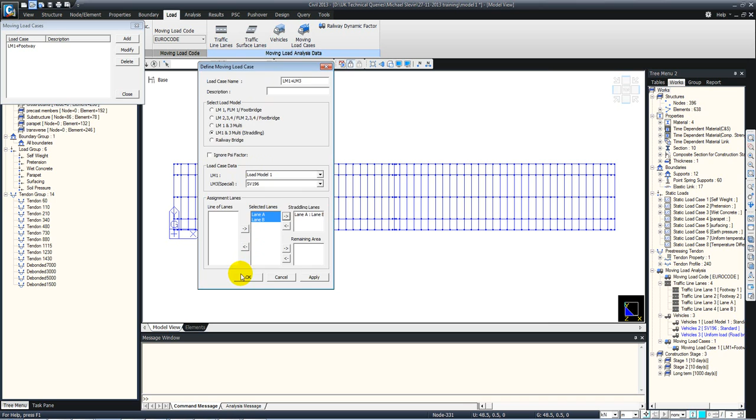Select straddling, so this particular vehicle, load model 3 special vehicle, can straddle between lane A and lane B. This time we will not ignore the psi factor, we'll consider psi factor for load model 1. Select SV196, lane A and lane B in the straddling lanes category and click OK. So let's go for these two combinations.

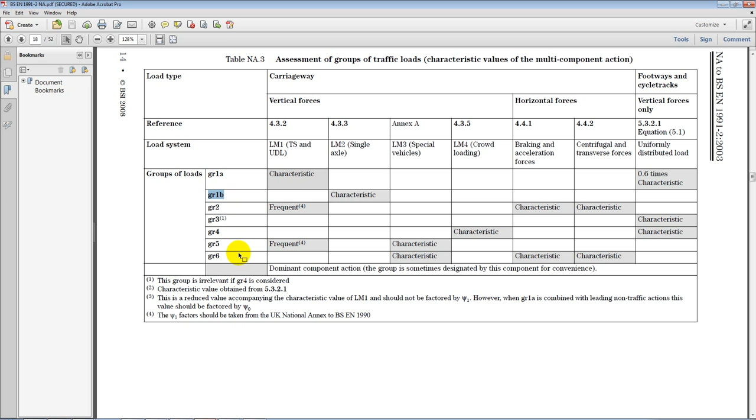We need to select other combinations as well as per this table in the national annex of Eurocode. It says we have done only group 1A and group 5 combination till now, so we need to create other combinations as well, but I will skip this for today's presentation. So let's go for only the two combinations.

Okay, so here we are. We have modeled the construction stages, the live loads, and now we are ready to do the analysis. So we can run the analysis from Analysis and Perform Analysis, which is this button here. So we can click on this. Okay, so the analysis has now been completed, so we can now look at the results.

So in the results combinations, we can create some load combinations for, say, the concrete design. Some of them are already created here. I'll just delete them and maybe create new combinations, auto generate, and say Eurocode, and we can select the different load factors and click OK, and the combinations will be generated for strength or serviceability.

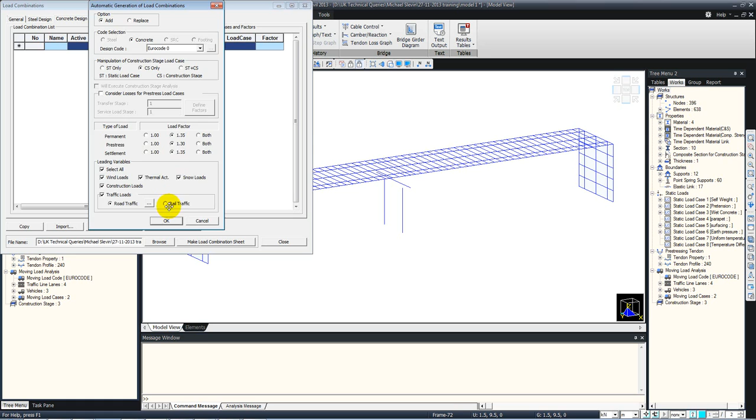We need to be careful in the combinations as well, because we can select construction stage only or static plus construction stage load cases. So since most of our loads are included in the construction stages, you should go for construction stage only and click OK. So that will include the dead load, which includes all other load effects that we included in the construction stage: creep, shrinkage, tendon, that is pre-stress, and load model 1 or the other load models can be included under the

serviceability or strength checks. We can create our own combinations by typing in the names, say combination, and say strength check, and we can add, say, self weight, we can add pre-stress, and let's say we can add the earth pressure as well, and we can add LM1 plus LM3. So we can give different factors to them and consider them in the design or the analysis.

Let's look at the results. So let's see the pier reactions at the bottom of the pier. Reactions, we can select load case, say self weight, values, and apply. So that's the reaction at the pier, and you have some reactions also for the abutment.

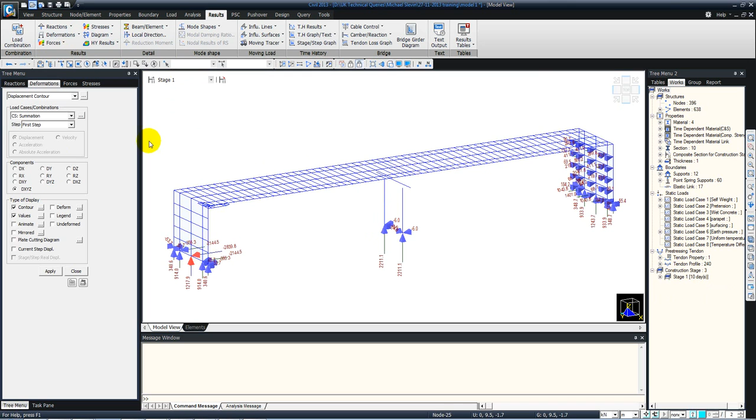Then we'll look at displacements. So we'll see stage by stage displacement. Stage 1, switch to the hidden view. Let's look at the deformations. Apply. That's the deformation in the structure. We can look at the different deformation for dead load, deformation due to dead load, deformation due to all effects, deformation due to pre-stress.

Okay, and we can check the long-term deformations as well. That's the long-term deformation. You can see the values here. You can make the legend to be fixed so it's more readable, changing it to millimeters. So that's the deformation value due to pre-stress, due to summation. That's the deformations due to the summation, 27 millimeters.

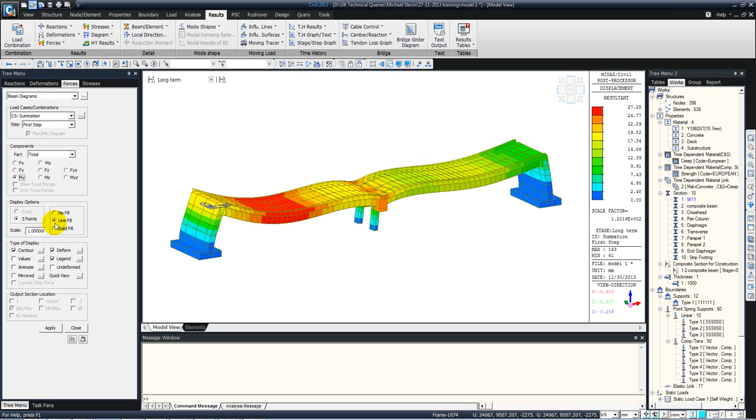Then we will check the force results. So let's go to long-term forces, beam diagrams, and we will focus on the forces. So let's see the beam diagrams here. So I'll just turn on the switch of the deformed shape. That's the bending moment in the precast beams.

We can also check the bending moment separately in the concrete girder and the slabs. So if I say part 1, which is the precast girder, and say apply, that's the bending moment in the precast girder. If I say part 2, that's the bending moment in the concrete.

Then we can check stresses. So if you want to see the beam stress diagram, go to beam stress diagram and select a particular part, say part 1 or 2, and select part 1, which is the precast girder, say combined axial plus bending, and we can select the points for generating the stresses. So let's say the bottom flange of the W beam, select 4 as per this figure and say apply. So that's the stresses in the bottom flange.

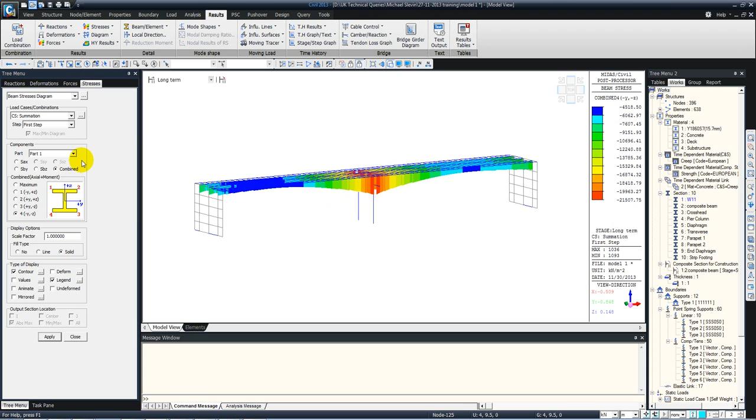You can see mostly they are the negative stresses in the bottom flange. Then we have part 2. We have got some stresses here. Part 2 is the concrete. So if I just say stress point 1, 1 means the top of the concrete slab, and that's the stress diagram.

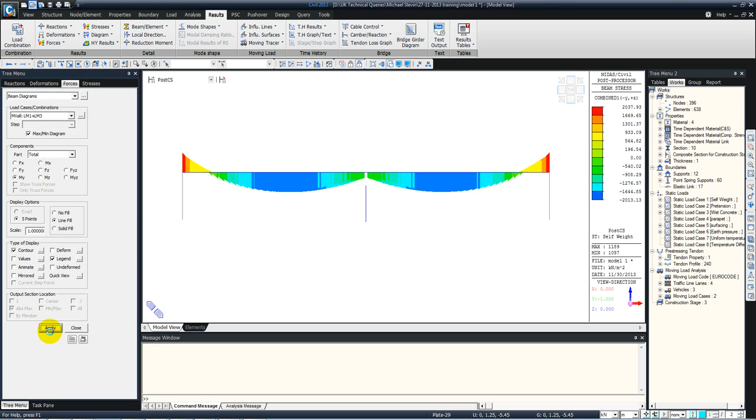And we can also look at the results for the moving loads, live loads. So let's say I go to post construction stage and select a live load case, say load model 1+3, and select forces, beam diagrams, say apply, solid fill. That's the envelope of the force diagram, the beam bending moment diagram.

And we can also check out the maximum or minimum element. So we can select a maximum element; for the maximum bending moment it is element number 1055.

So we can go to moving load tracer, beam forces/moments, and type in the number of that element, 1055, and select load model 1 and 3, and we can see the vehicle position causing maximum bending at this location. That's the vehicle position. You can zoom in and you can see the results here.

Now if we were to design, we can extract the results for bending moments and shear forces in the sections using result tables. So any type of results can be extracted from here. We can go to beam force and stress, and we can select a load case and see the different components of the forces here with the element numbers noted here.

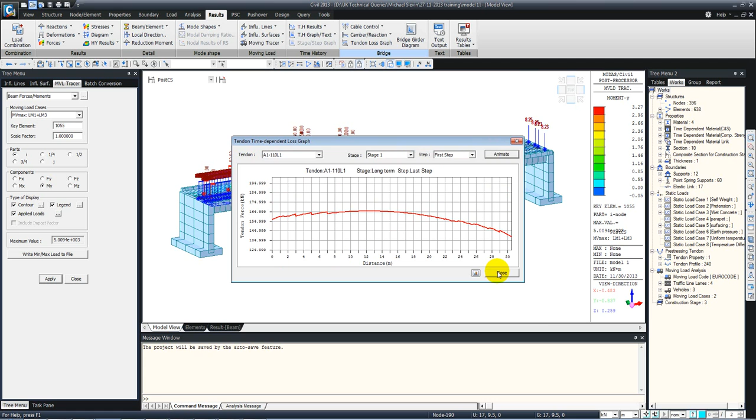We can also get a tabular report showing the different loss components. So tendon loss, we can select a particular group from here, like tendon 60 is selected over here, and we can select a stage from the stage selection box.

And that will give us the tendon stress loss, and we can check the tendon force loss as well. So force after immediate loss when we pre-tensioned the tendons was 180. We applied 200 kilonewton as the force, and then we had creep losses, relaxation losses. Okay, so that's how we can check the results for different force components in the bridge.

We can also design some of the members, like if we want to check the reinforcement for the concrete piers, we can enter some value for the reinforcement in column section data for checking. You can enter some ties arrangement, and we can enter the rebar values, 20 millimeters and 20 here,

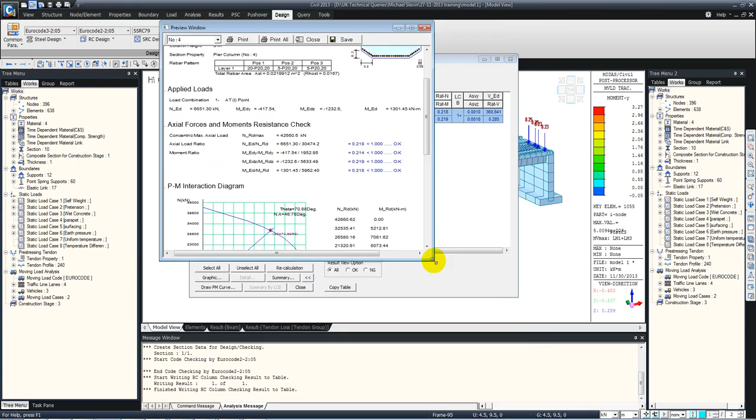That's how the rebars will be added, and cancel, and we can say concrete code check, column checking, and that will run the design for the columns. We can see that's in blue; that means it's passing the check based on the rebars we have entered. We can select the column here and say graphic, and that will give us a summarized report for the column,

and we can draw the PM interaction curve for the reinforced concrete design, and we can select a particular column out of them and click on detail, and that will give us the detailed step-by-step calculation report. So that's the workflow for the modeling and analysis of the precast bridges.

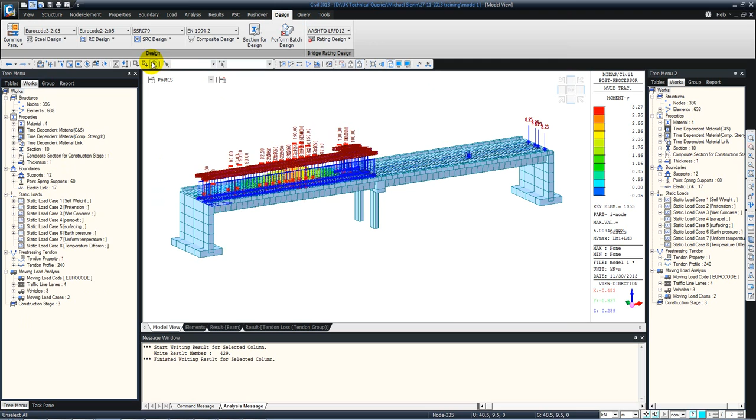One thing I would like to mention here is that the results that you obtain from this example may not be accurate, because this is just a demonstration. For the correct results, we should always check whether our section properties and materials are properly applied to the structure, and then we should be able to get the correct results. So that's basically the conclusion of this presentation.

We saw how to bring in a section from AutoCAD, how to assign tendons to it, how to define construction stages, creep properties and shrinkage properties, and then how to design a simple column. And then we can just use these member forces.

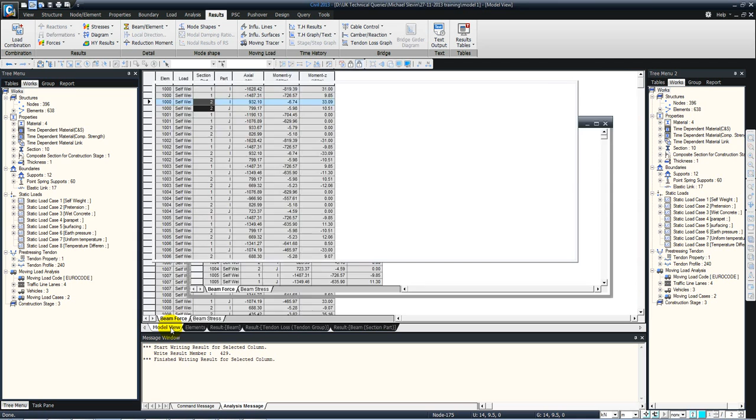So for the composite section, we get the part-wise results in a table format. We can take it from here and select, say, self weight, and we get the results for the composite section part-wise, part 1, part 2, that is beam and the deck, and then we can include them when we're doing the design check and see the results. So that's it for now.